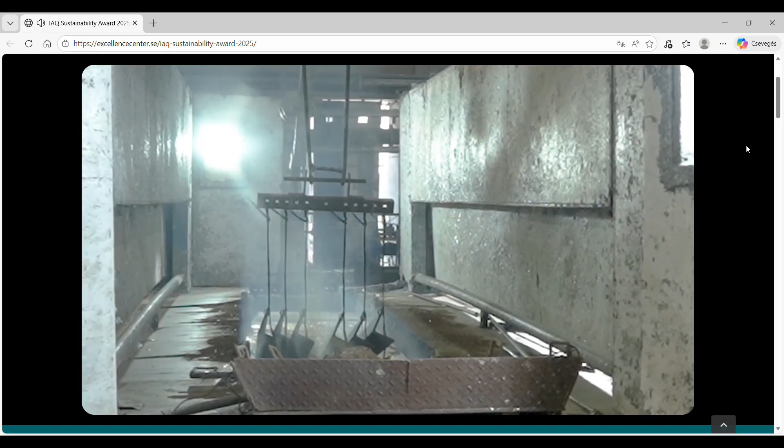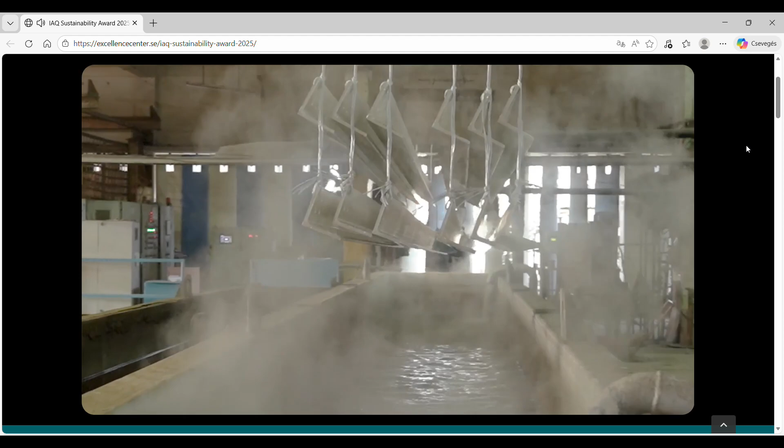In a world racing against climate change, L&T made a promise: water neutral by 2035, carbon neutral by 2040. A promise not written in reports, but etched into responsibility. But promises demand action, especially where the fire burns hottest. At TLT Works Pithampur, every transmission tower follows a precise manufacturing journey, from design to fabrication, to galvanizing and dispatch. But among all these stages, one process contributed the most to our carbon footprint.

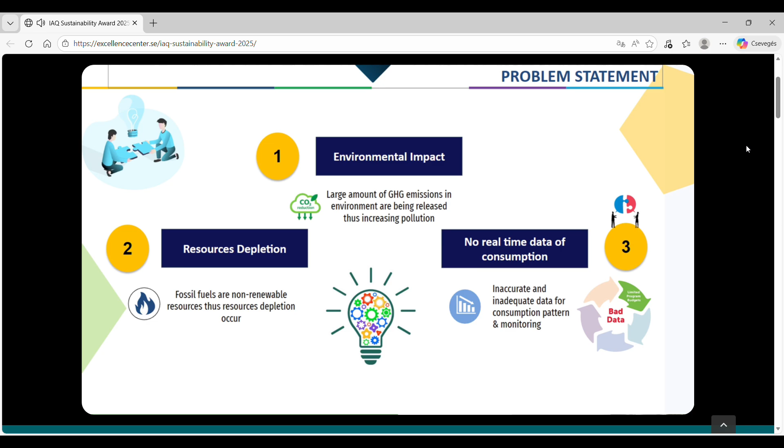Our galvanizing furnace consumed 836 tons of LPG every year, releasing 2,492 tons of CO2 into the atmosphere. This created 3 critical challenges: environmental impact, resource depletion, and the absence of real-time energy monitoring. To advance toward carbon neutrality, this had to change.

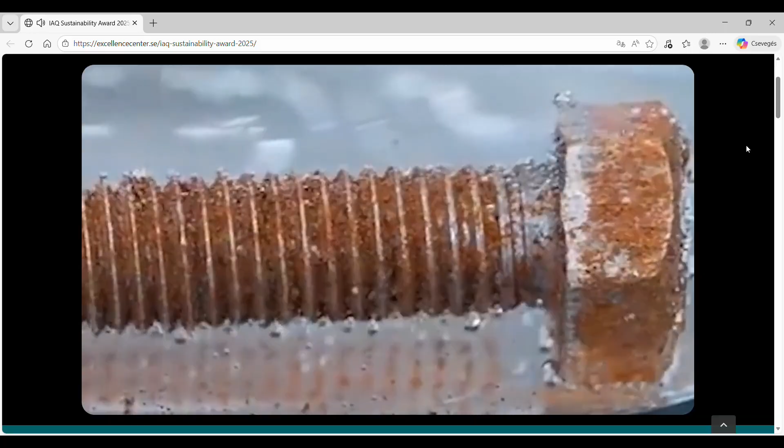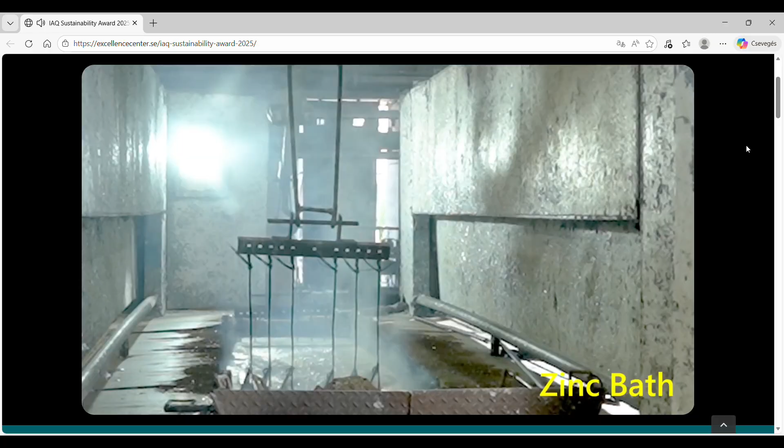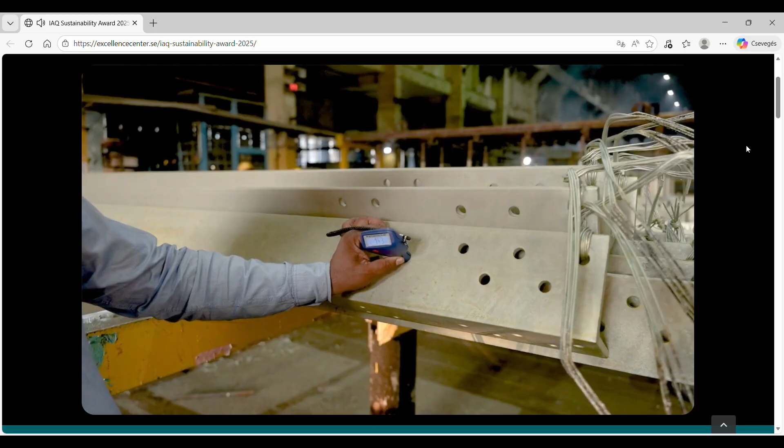The galvanizing process begins with surface preparation. Steel passes through degreasing, pickling, rinsing, and fluxing, removing oil, rust, and impurities to ensure strong adhesion. Next, the clean steel is immersed in molten zinc at 450 degrees Celsius. A metallurgical bond forms, creating a corrosion-resistant layer. Even if scratched, zinc protects steel through sacrificial corrosion, extending its service life for decades.

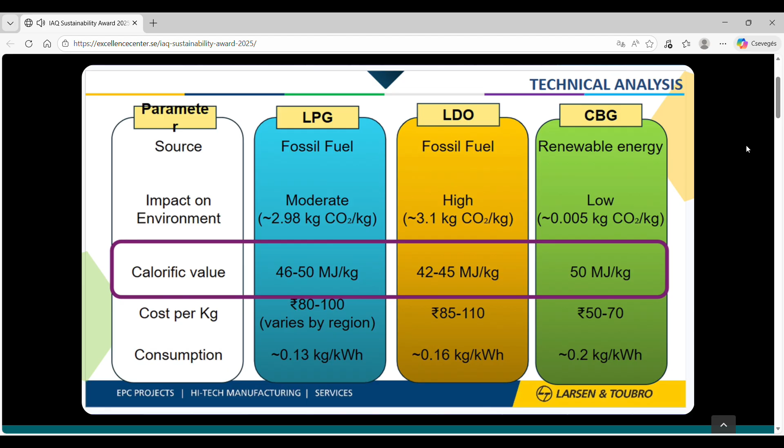We evaluated alternative fuels. LPG emits 2.98 kilograms of CO2 per kilogram of fuel. LDO emits 3.1 kilograms. But compressed biogas emits only 0.005 kilograms, making it almost carbon neutral. And with a calorific value equal to LPG, CBG became our preferred alternative. With detailed analysis and quality-driven brainstorming, we decided to transition our galvanizing furnace from LPG to CBG.

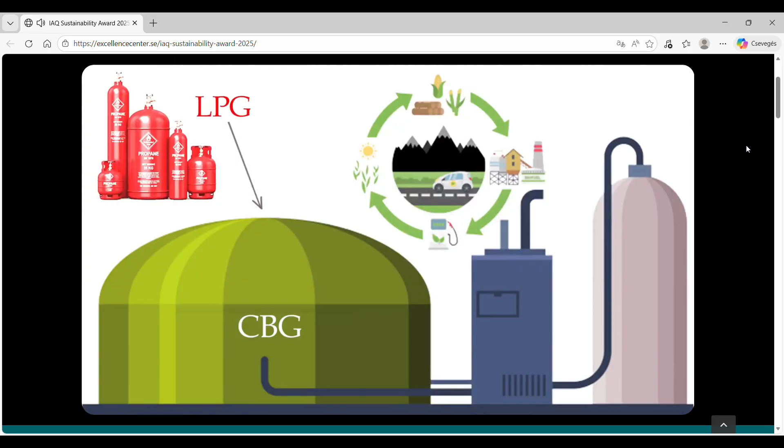We visited Indore's Gobardhan plant, Asia's largest biogas facility. We verified pressure, purity, and moisture content, and secured a reliable supply of compressed biogas for continuous furnace operations. Our first trial failed. The second failed. Moisture choked the burners. Pressure dropped. The flame collapsed. But through every setback, quality guided our next step.

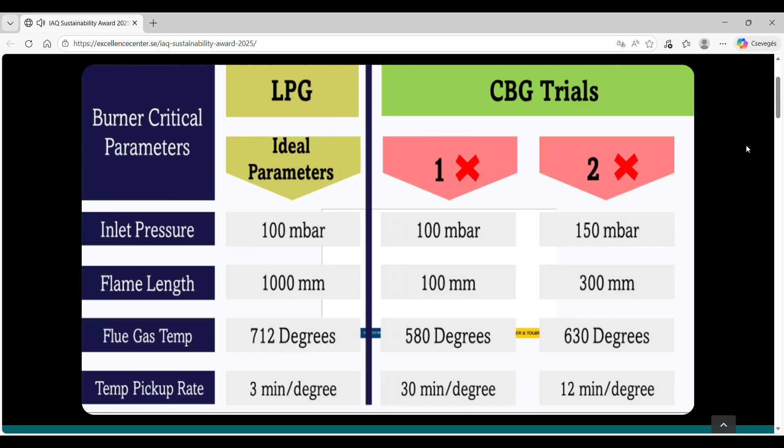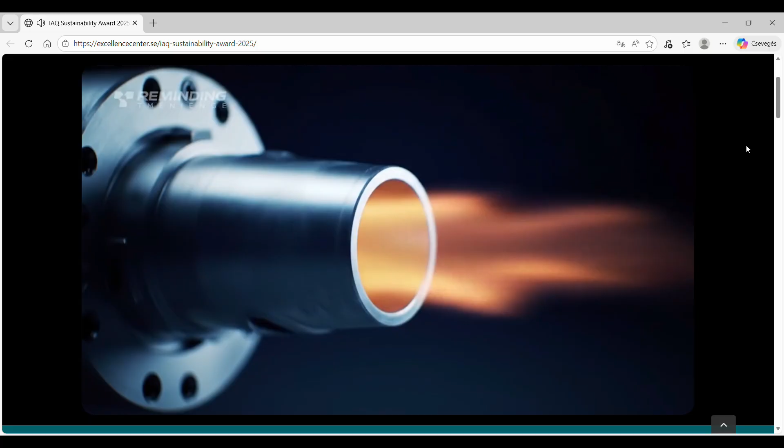To solve contradictions, we applied TRIZ, using Principle 35 to redesign a 12mm tapered nozzle, achieving 98% flame stability and a 10% increase in thermal efficiency. Using design of experiments, we optimized air-fuel ratios and pressure levels, reducing CO emissions to below 68 parts per million. Through Six Sigma, we controlled CO2 intensity to 0.005 kilograms per kilogram of fuel, within a tolerance of plus or minus 0.5%. And with 12 PDCA cycles, we achieved flame length consistency within plus or minus 2% at 150 millibar.

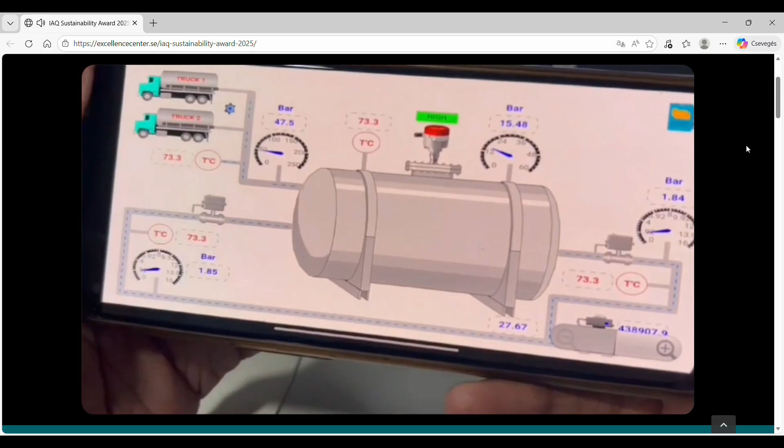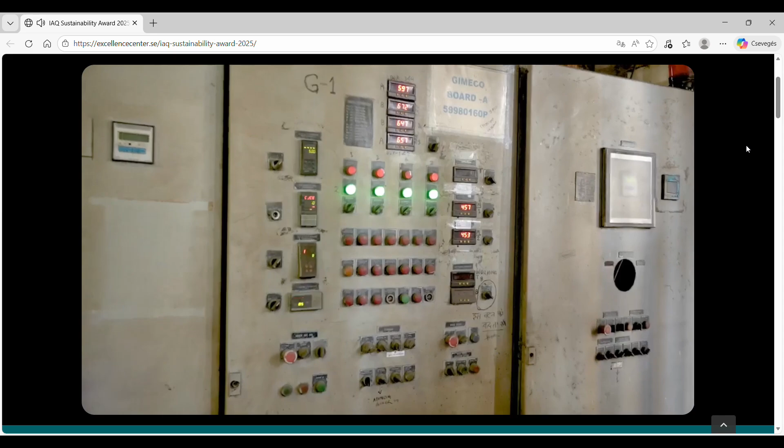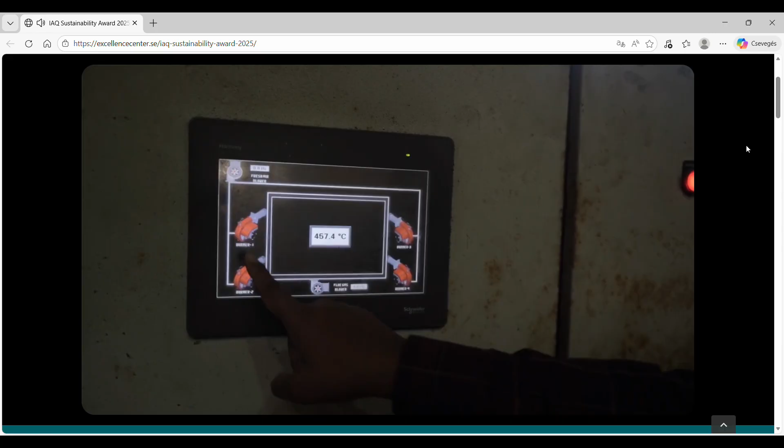A GSM Gateway enabled real-time mobile monitoring, bringing digital precision to our combustion system. We identified key risks: pressure surges, moisture carryover, and ignition failure, and mitigated them using safety interlocks, heated gas trains, pressure relief devices, and automated shutdown logic. Our solution was a multi-stage pressure regulation system with heating, moisture removal, dual ignition, and IoT-based control.

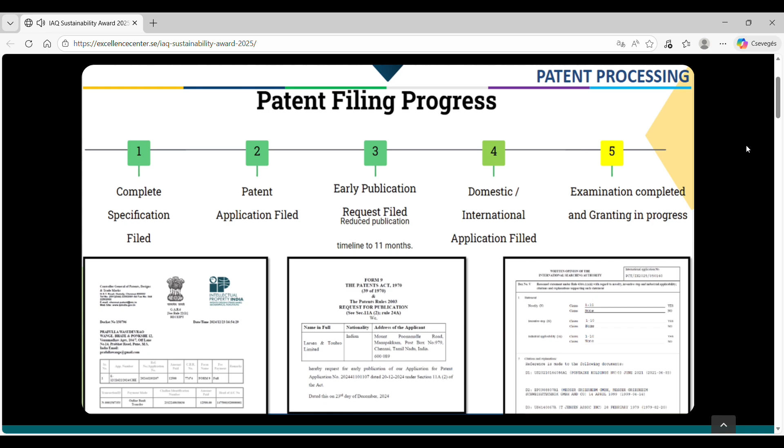This innovation is now protected under PCT/IN 2025/050160 and Indian Patent Application 2024-411-01107, recognized for novelty and inventive step. With this breakthrough, L&T Pithampur became India's first galvanizing facility to operate entirely on compressed biogas.

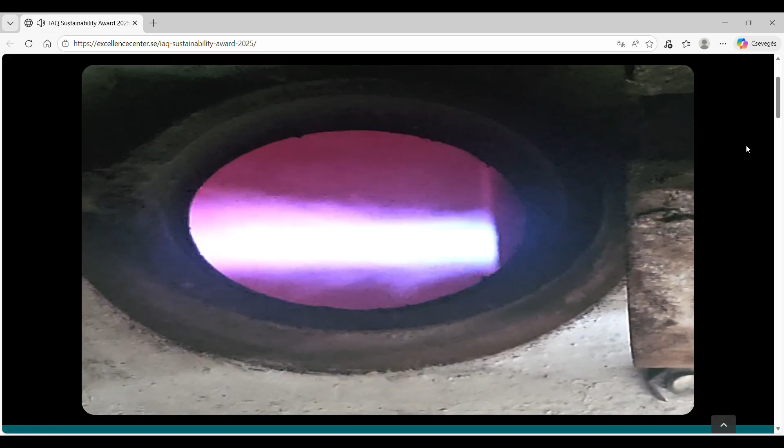One morning, the flames stood steady, quiet, clean, and perfect. A flame reborn for the planet.

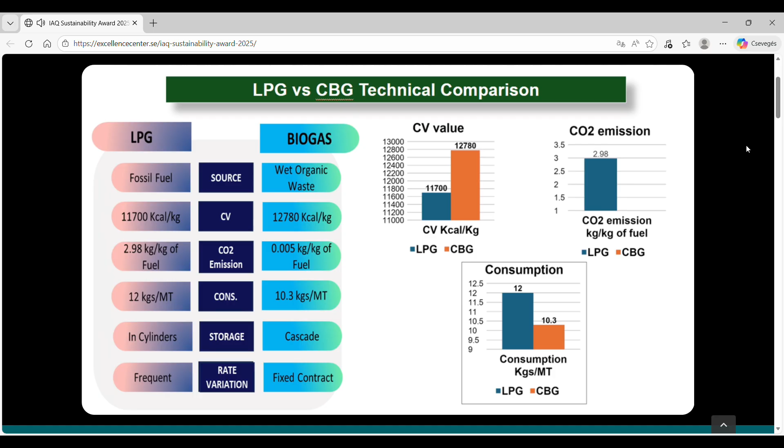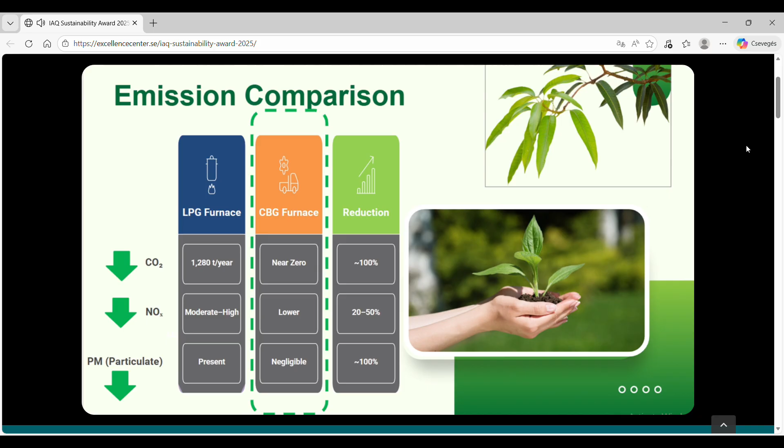Our results are measurable and impactful. CO2 emission intensity reduced from 3.01 to 2.75 kilograms per kilogram of fuel. Specific consumption reduced from 11.6 to 10.5 kilograms per metric ton. Combustion efficiency increased from 89.2% to 97.8%. And system uptime improved from 92% to 98%.

Our annual CO2 reduction now stands at 3,800 tons, equivalent to planting 171,818 trees every year. This initiative advances SDG 7, Affordable and Clean Energy, SDG 9, Industry, Innovation and Infrastructure, SDG 12, Responsible Consumption and Production, SDG 13, Climate Action.

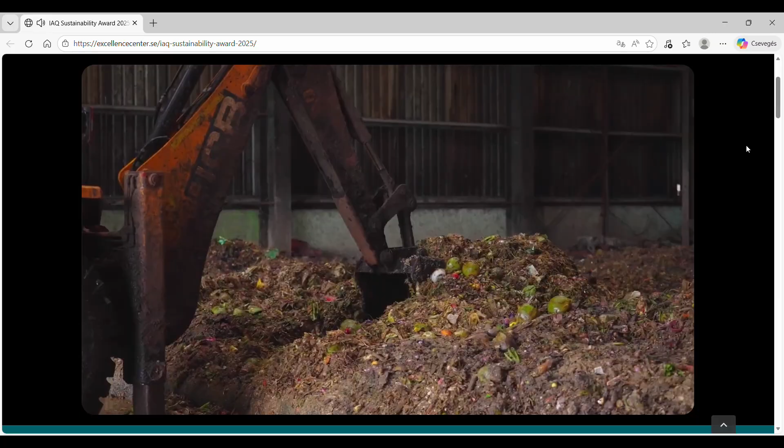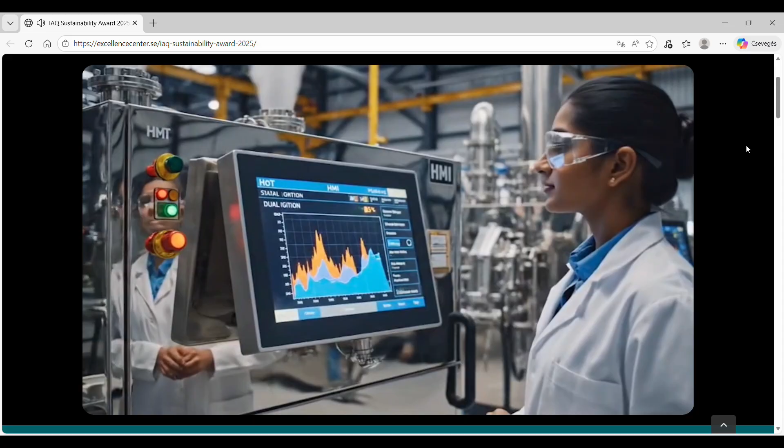Circular economy benefits include 550 tons of municipal waste converted into 17 tons of CBG and 100 tons of organic compost. Digital twin integration now tracks 470 data points per hour, enabling predictive decarbonization. And this model is being scaled across L&T facilities, achieving up to 42% OPEX reduction.

Neil Armstrong said, 'One small step for man, one giant leap for mankind.' This is our small flame, our giant leap toward a cleaner world.

Thank you very much for the presentation. For a change, I will start with a few questions. Two simple questions. The first one is about the leverage potential. In what way can this be expanded to other areas? And of course, this is dependent on availability of CBG gas.

Yes, sir. It can be implemented horizontally, can be deployed in other areas also. But as you said, the availability remains a constraint. If the gas is available, I think there should be more and more usage in such areas, like in our case for galvanization, like some more productions. Other factories in India, we are around setting up 30 plants with the help of our Prime Minister, Mr. Narendra Modi. So these type of plants will be located in various areas of the country. So I think the supply would not be a constraint in near future, sir.

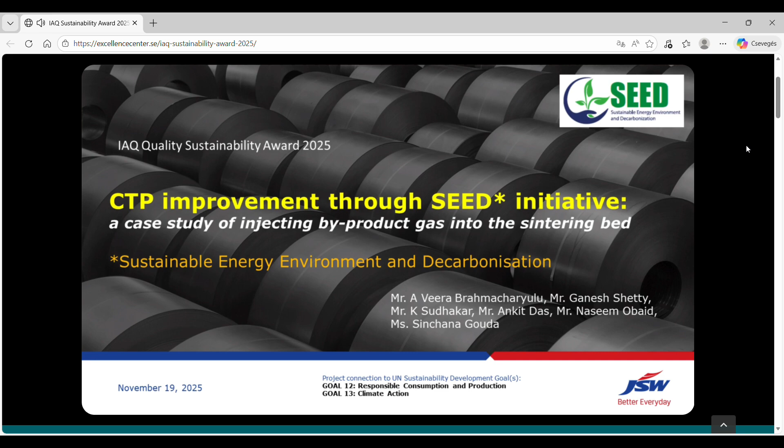Sinter, pellets, and coke are charged in blast furnace to produce hot metal, and pellets are charged in DRI shaft to produce DRI. The steel scrap and hot metal are charged in basic oxygen furnace to produce liquid steel. The steel scrap and DRI are charged in electric arc furnace to produce liquid steel.

The liquid steel is cast in continuous casting machines to produce slabs and billets. The slabs are rolled in hot strip mill and cold rolling mills to produce flat products. The billets are rolled in wire rod mill and bar rod mills to produce long products.

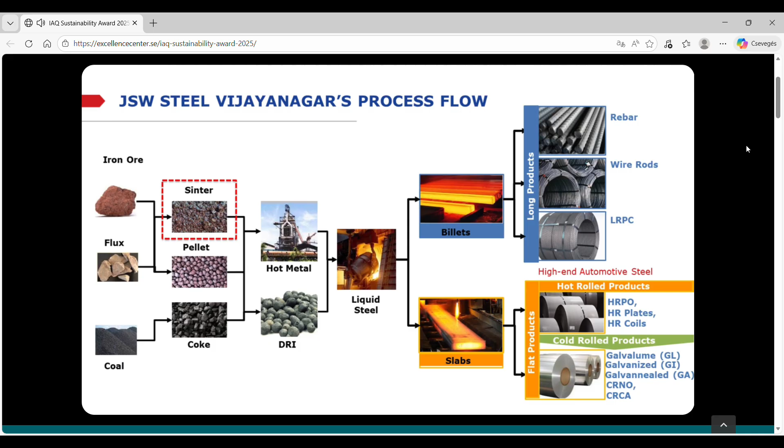The byproduct gas generated from coke oven, corex, blast furnace, LD, and DRI are mixed and called mixed gas. The mixed gas is used for various heating applications in the entire integrated steel plant.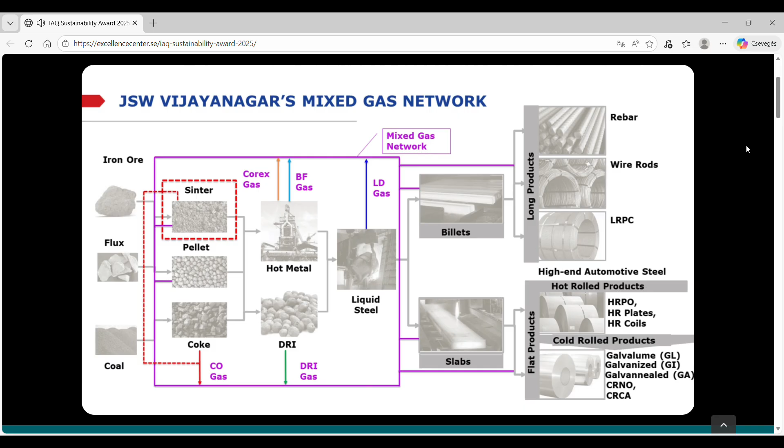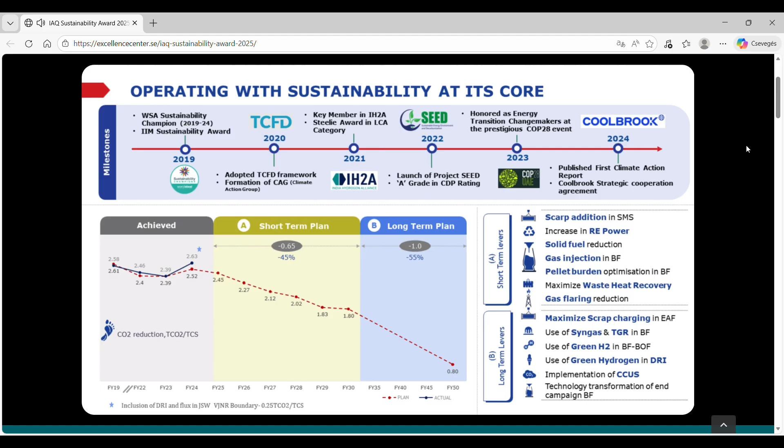This is the roadmap for decarbonization consisting of renewable energy, green hydrogen-based steel making, carbon capture, utilization, and storage. Here is the strategic plan to reduce the current CO2 footprint from 2.5 tons to 0.8 ton per ton of crude steel. Our incremental decarbonization initiative, SEED, stands for Sustainable Energy, Environment and Decarbonization.

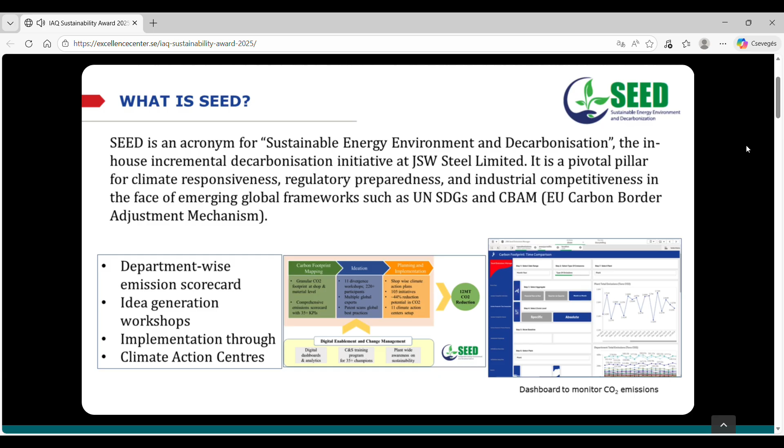This is a dashboard to monitor CO2 footprint. There have been several quality improvement programs through SEED. Our case study, injecting coke oven gas into the sinter bed, showcases improvement in CTP, critical to process. We also improved the production and CTQ, critical to quality.

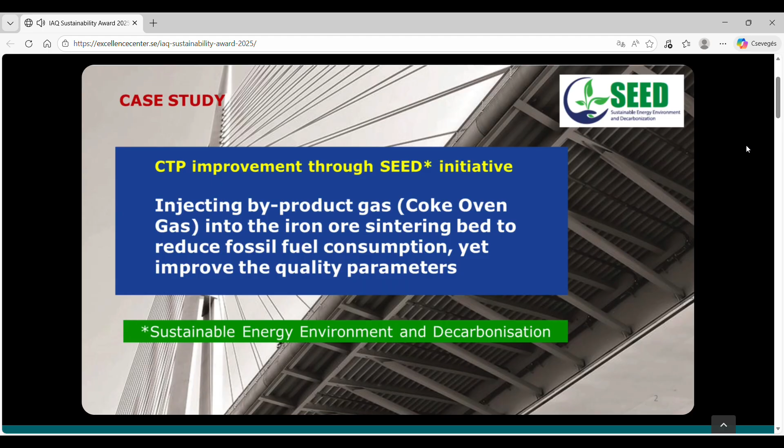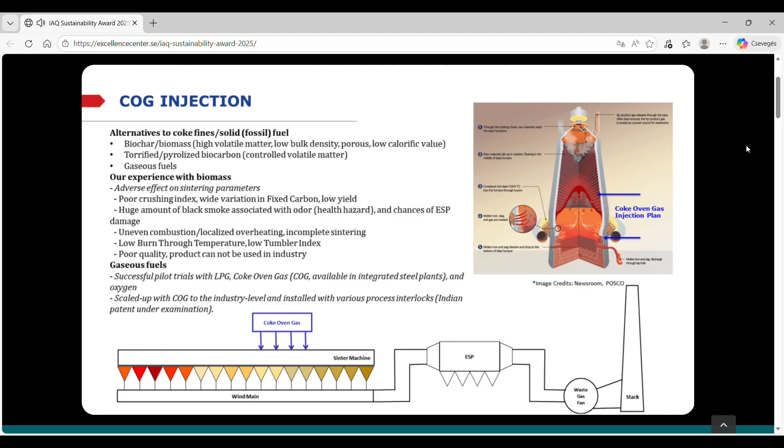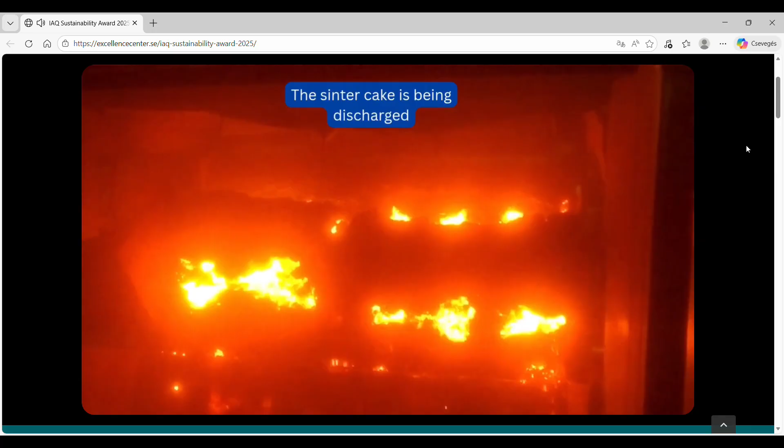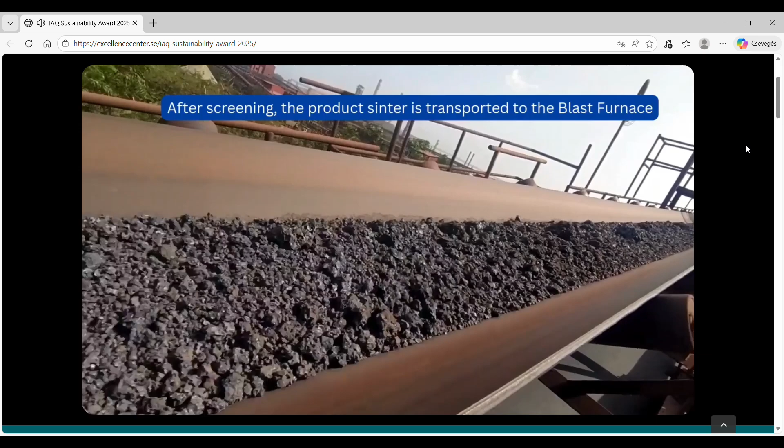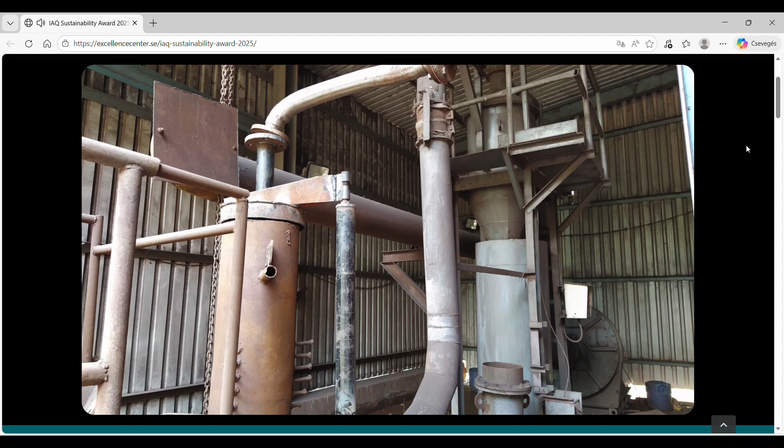The pilot trials began in 2019 using sinter pot facility. It did not have arrangements to inject gases, so we introduced a gas injection system and conducted trials. The product sinter was dense, had higher strength, and better elevated temperature properties. Due to parametric interplay which is inherent to sintering process, the alpha in the design of experiment showed 1.4.

Oxygen, which can improve the combustion efficiency of coke, and liquefied petroleum gas LPG as an alternate gaseous fuel were injected to see their effects. The coke oven gas has about 57% hydrogen, a carbon neutral source of heat and reductant of the iron ore.

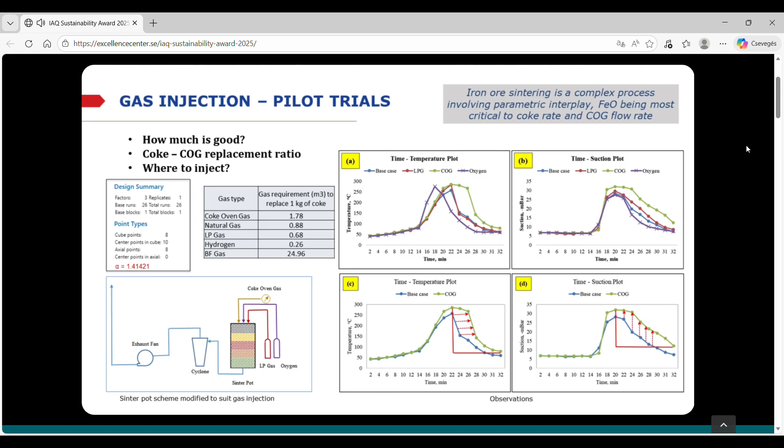When injected, COG outperformed LPG. Hydrogen in the COG enhanced FeO formation. Superior mineralogical phase assemblages were noticed, which resulted in enhanced properties of the sinter. The voice of the process indicated improved thermal regime and mineralogy.

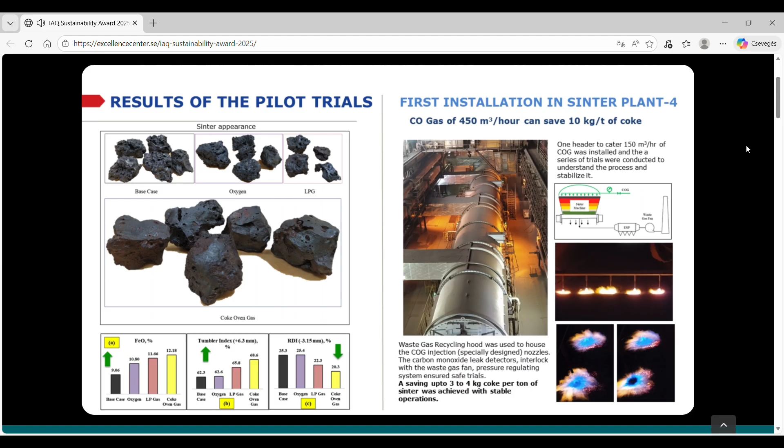After proving the concept, we scaled up by designing COG header, nozzles, and installed the system in Sinter Plant 4 in 2020 during COVID times.

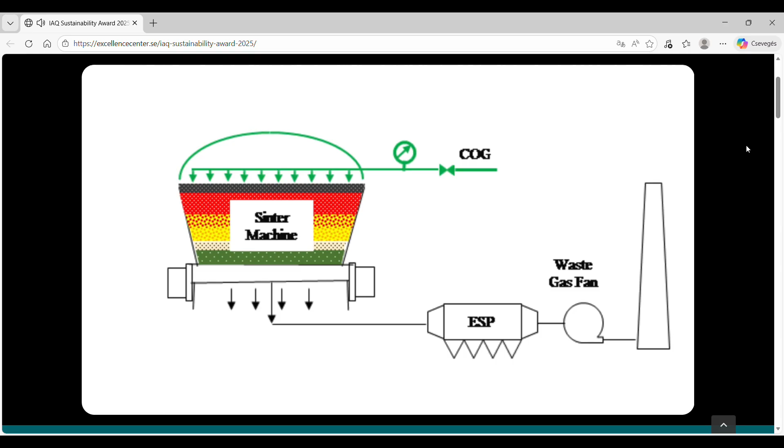This is the scheme of the injection system. The design involved 3 headers of 150 cubic meter per hour capacity each, and nozzles to inject COG close to the sinter bed.

Multiple trials were conducted to fine-tune the process, and we continued injecting for more than 1.5 years. Sinter plant 2 and 4 consume the base mix from a single source.

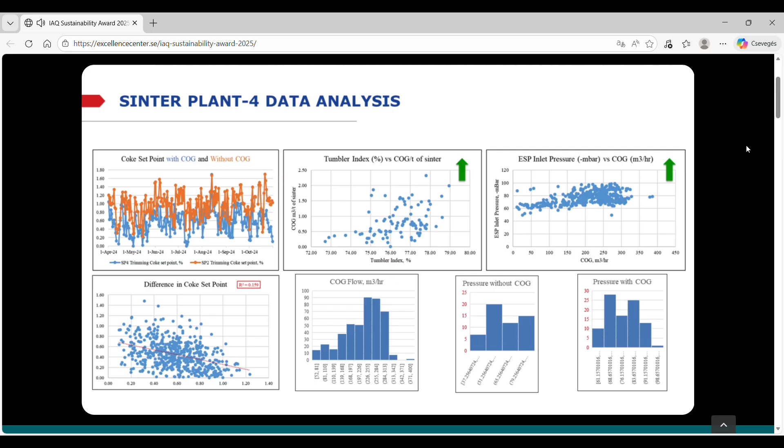With COG being injected, sinter plant 4 consumed less coke, as seen by the coke run chart. The tumbler index and suction increased due to COG. Analysis of variance shows the process capability of FeO increased from 0.27 to 0.35.

After successfully proving the industrial scale concept, the COG injection system was installed in sinter plant 3, which is double the capacity of sinter plant 4.

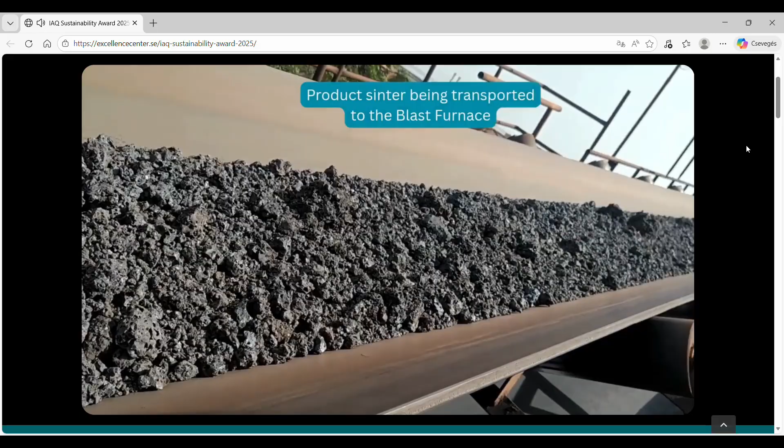Data analysis of sinter plant 3 indicated higher tumbler index and process capability. In both sinter plant 3 and 4, the elevated temperature property RDI remained unchanged. Hypothesis testing confirmed that the sintering process is not delayed due to prolonged thermal regime.

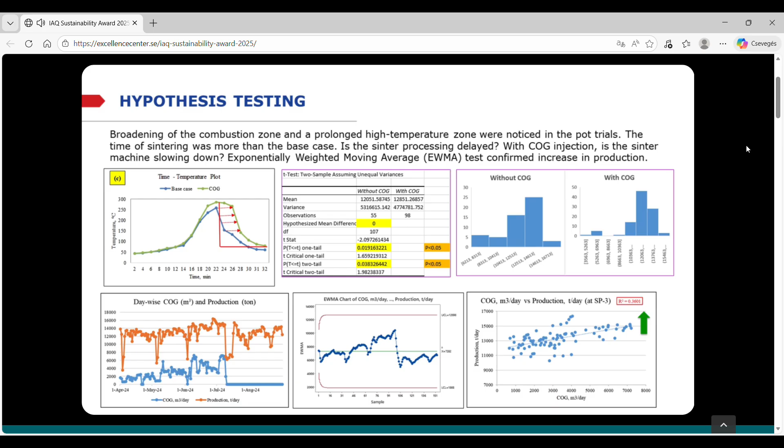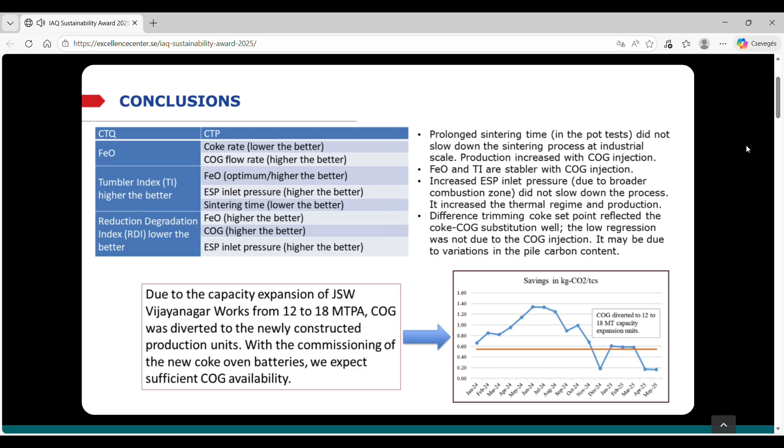Exponentially weighted moving average confirmed an increase in production of 800 tons per day, that is about 6%. With this improvement, it is possible to save about 30 Indian rupees per ton of sinter, or 2.3 million Indian rupees per annum directly. Thank you.

Yes, thank you very much for the presentation and the project. Any questions from the team?

One of the elements of the award talks about leverage potential, and this is a very good and interesting project. But it's obviously very much focused on, in this case, sintering and within the steel plant. Do you see any other areas where there could be an application for this technology, this idea of injecting gas into a stream of material?

Beyond integrated steel plant, sir? Yes. I know all about steel plants and sintering in steel plants, but I was wondering if the concept as such, if you see any other application areas.

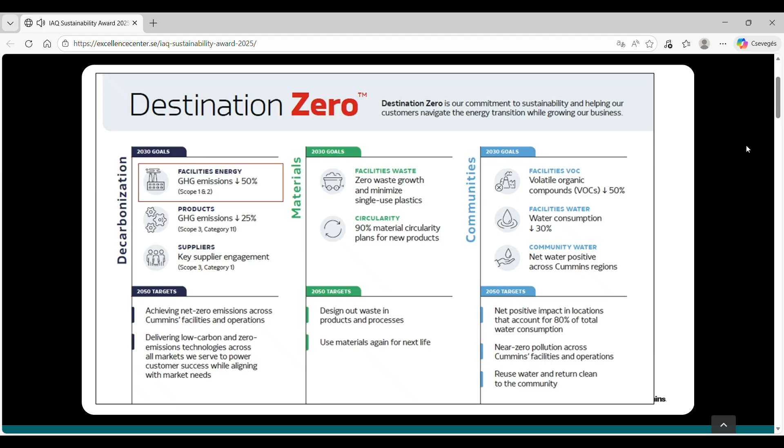With that in mind, I'll give you an overview of the Destination Zero goals. The first goal talks about facilities energy: greenhouse gas emissions reduction by 50% from the base level of 2018 by the year 2030. With that in mind, the team started looking at opportunities for how the quality function can contribute towards these Destination Zero goals.

One of the areas that the team identified is where we test our engines post-production in our test cells. This consumes a lot of diesel because of the test cycles used to check the product's performance for customers and customer-specific requirements. The team thought through how we can bring down the overall GHG emissions by optimizing the test cycles, and whether we can improve quality while achieving GHG emissions reductions.

So a Six Sigma team was formed. Cummins has a very good culture of Six Sigma, and it is embedded in the culture of the organization. We have dedicated roles of master black belts, and there are people who also do projects as green belts. So a Six Sigma team was formed with the black belt taking the lead on test cycle optimization, because that was the major opportunity for GHG emissions reduction.

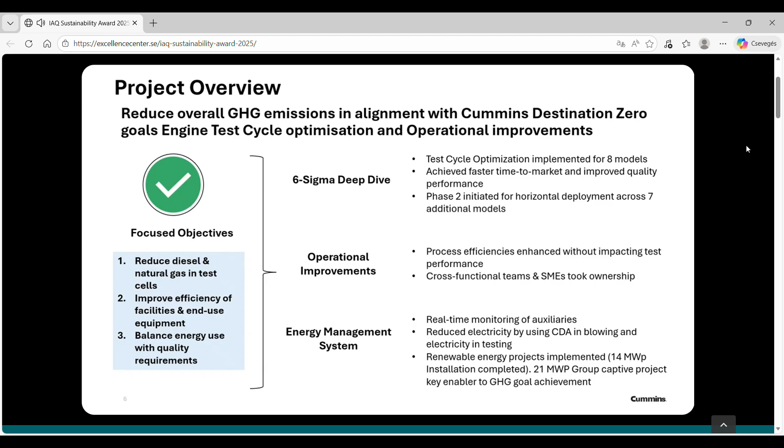So base work was done checking the level of test cycles being used for the current products and platforms, and the opportunities in the operations of the auxiliary units that support the entire test cell system. All put together, can we bring down the scope 1 and scope 2 GHG emissions without impacting quality? And the energy management system was one of the key enablers that helped us in measuring, monitoring and identifying the gaps in what can be done differently in scope 2 generation and consumption of electricity as well.

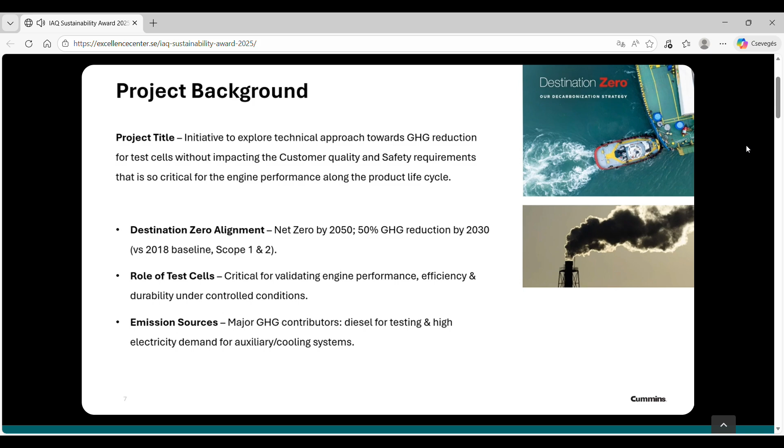So with that project background, the team started really collecting data in terms of each of the platforms, what was the original test cycles and what can be the next level through the CAE analysis to check whether the revised test cycles that the team was trying to contemplate through the simulation tests, when actually applied in the test cells during the testing cycles, would yield the same result or not, and would have no long-term impact when the engine is already in the field.

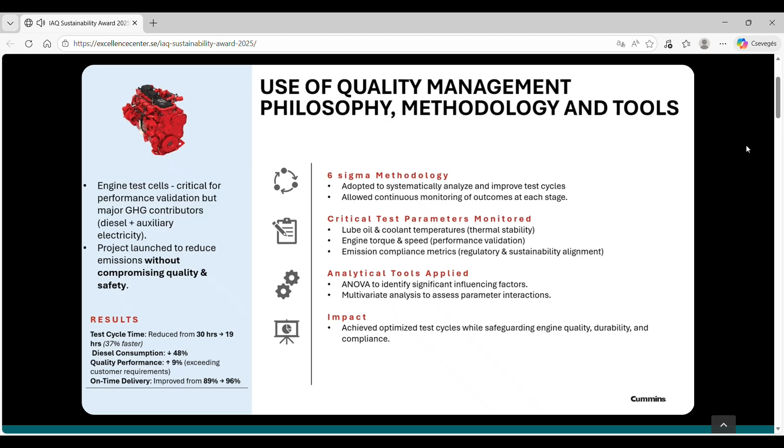With that premise in mind, the team started doing a lot of data mining in terms of collecting the data on the test cycle parameters, and trying to really project through the simulation analysis. A lot of tools were used like ANOVA and multivariate analysis. I'll come to it in the last slide, but overall results showed that for all the 8 platforms the team chose, the average time of testing came from 30 hours to 19 hours, which was a substantial reduction.

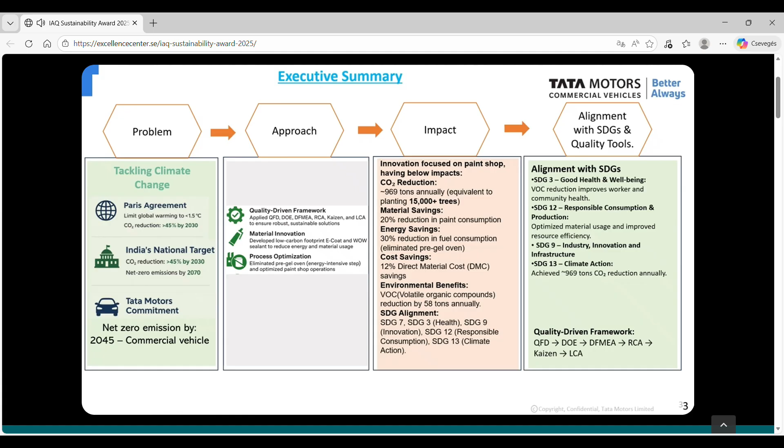Our efforts directly contributed to 4 key sustainable development goals, including climate action and good health. This alignment ensures our innovations are not only impactful but also globally relevant. Through innovation, quality and commitment, Tata Motors is driving meaningful change towards a sustainable future for commercial vehicles.

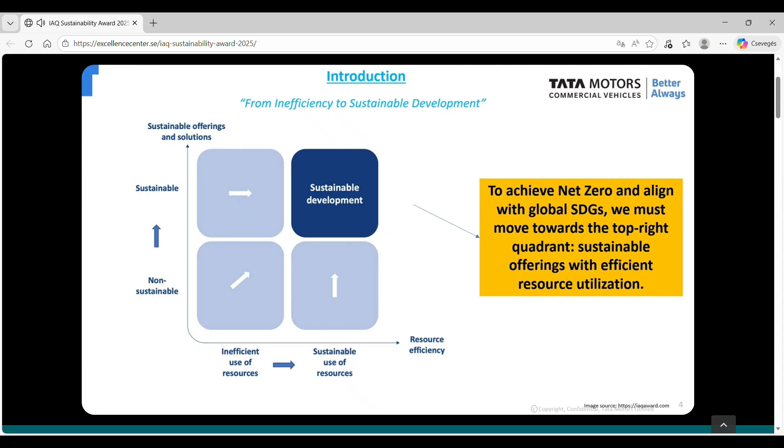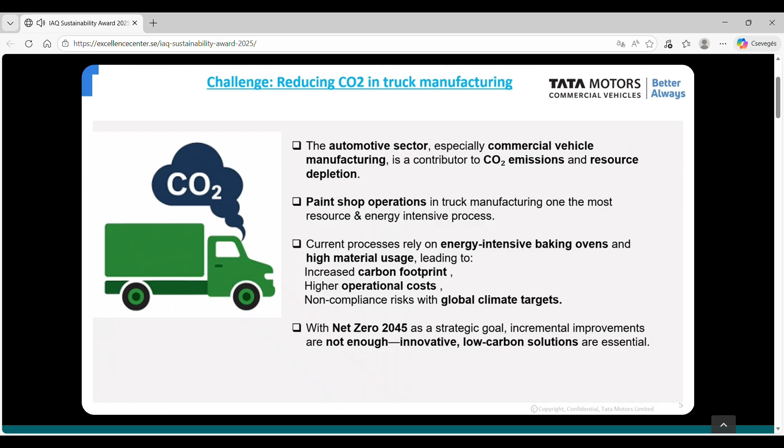With Tata Motors Commercial Vehicle aiming for net zero by 2045, we recognize that incremental change won't be enough. What's needed is a transformational shift. That's where innovative low carbon solutions reimagine how we operate. This challenge sets the stage for the approach and innovations we will discuss next.

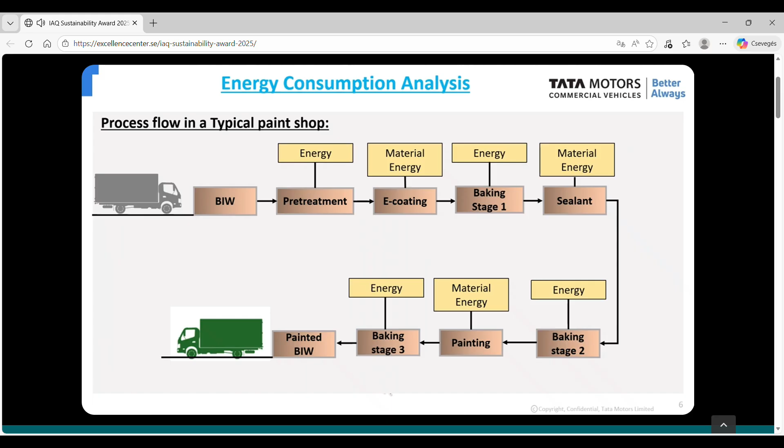Reducing energy consumption in these stages is not just about cost saving, it's about aligning with our net zero goals and driving sustainable manufacturing practices.

To further understand the challenge, let's look at the energy consumption across different stages of vehicle manufacturing. This analysis, based on industry data and internal assessment, breaks down energy use into key areas: body shop, paint shop, line, motor pool, and shipments. But the most striking insight comes from the paint shop. The paint system alone consumes between 30% to 50% of the total energy and material used in the entire manufacturing process.

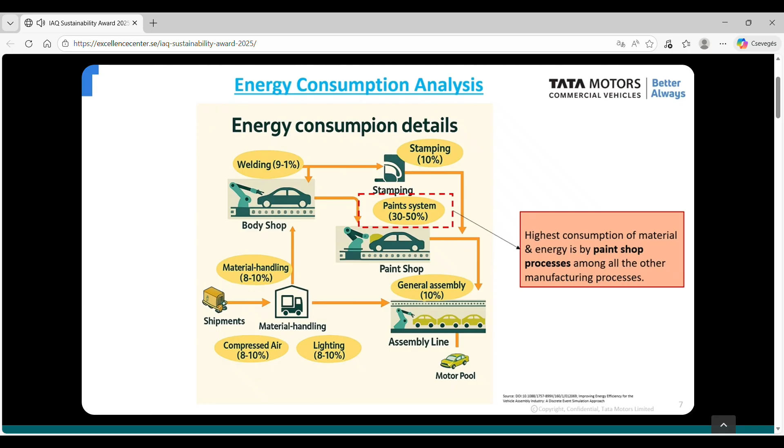This makes it the single largest contributor to energy consumption and carbon footprint in our operation. Given this, it's clear that any meaningful reduction in CO2 emission must begin with rethinking how we operate our paint shops. And this insight has guided our innovative efforts and our focus on the paint shop energy consumption and material consumption reduction, which we will explore in the next section.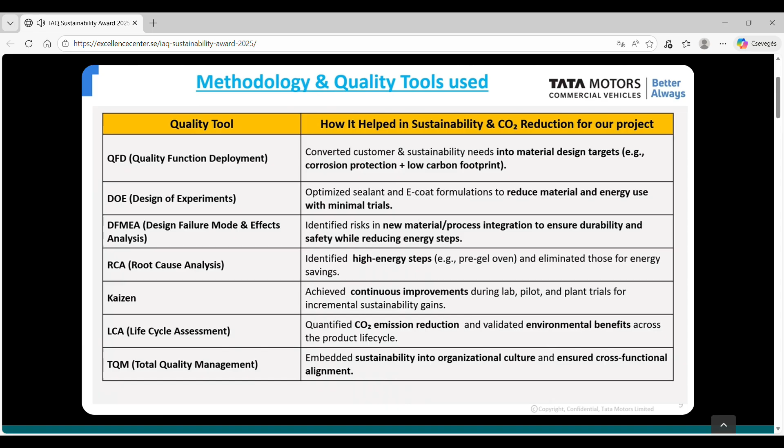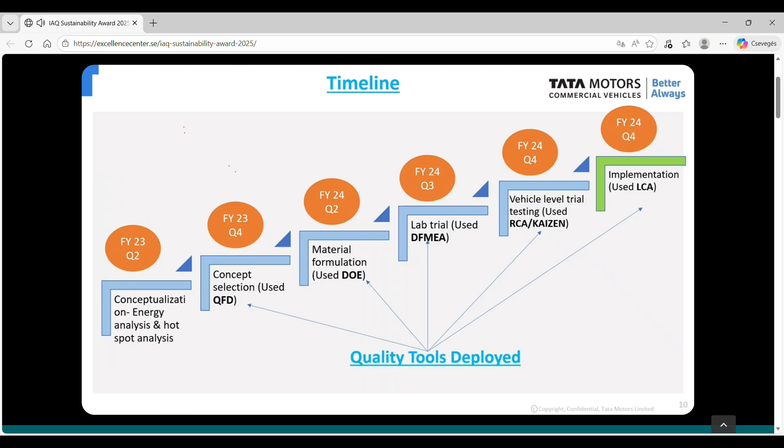Our life cycle assessment, LCA, quantified CO2 emission reduction and validated environmental benefits across the product life cycle. Finally, total quality management embedded sustainability into our organizational culture and ensured strong cross-functional alignment. Together, these tools formed a robust framework that enabled us to deliver impactful sustainable innovation. This slide shows the timeline, from the start till the end, and where at each milestone which quality tools have been used and how they have helped achieve this final goal.

This slide showcases the key innovations that help us significantly reduce energy and material consumption in our paint shop operations. Let's start with the process flow. Traditionally, the paint shop involves multiple stages starting from BIW, moving through pre-treatment, e-coating and several baking steps before reaching the final painted BIW. Now, two major innovations were introduced in this flow. First is the E-coat stage. We developed advanced high-throw power E-coat. This was achieved by incorporating a branched epoxy resin structure with flexible hydrophobic segments, and this reduced both material consumption and baking temperature, leading to lower energy use.

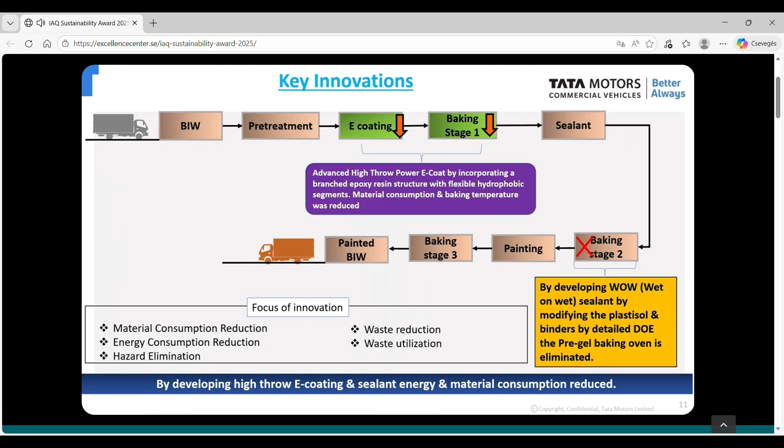Second, we introduced a WOW sealant, which is wet-on-wet sealant. This breakthrough allows us to eliminate baking stage 2 entirely, which was previously a major energy consumer. By eliminating this oven, we achieved a substantial energy saving and reduced operational complexity. These innovations were not just about efficiency, they were designed with a broader sustainability focus. As highlighted below the diagram, our goals included reducing material consumption, reducing energy consumption, eliminating hazardous steps, minimizing waste and utilizing waste effectively. In summary, by developing a high-throw E-coat and WOW sealant, we have made significant strides in reducing both energy and material consumption, aligning our operation with our net zero goals and global sustainability standards.

This slide summarizes the tangible outcome of our sustainability initiatives and how they align with the United Nations Sustainable Development Goals. The 4 United Nations Sustainable Development Goals, SDG 3, which is good health and well-being, SDG 9, which is industry, innovation and infrastructure, SDG 12, which is responsible consumption and production, and SDG 13, climate action, are directly impacted as described in the table above.

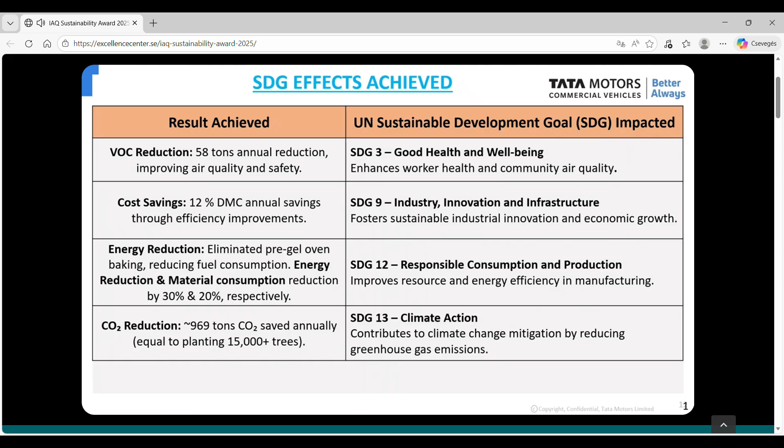These slides highlight the unique breakthroughs that set our innovation apart, not just in terms of performance, but also in sustainability and process efficiency. Let's begin with how we have revolutionized process efficiency. We successfully eliminated the pre-gel oven baking step, which was one of the most energy-intensive stages in the paint shop. This not only reduces energy consumption, but also simplifies the overall painting process. Importantly, we achieved this without compromising corrosion protection. The integrity and durability of the vehicle remain intact even with the streamlined process. This marks a significant step towards sustainable manufacturing, enabling a more agile and energy-efficient production environment.

Now let's look at the material innovation that made this possible. We developed a wet-on-wet sealant formulation featuring a novel polymer backbone and adhesion promoter. This allows paint to be applied directly over wet sealant, eliminating the drying and reducing cycle time. We also introduced a high-throw E-coat using a branched epoxy structure. This enhances internal surface coverage and corrosion resistance, especially in complex vehicle geometries.

Together, these innovations not only improve performance and durability, but also significantly reduced energy usage and operational cost, making our manufacturing process more sustainable, efficient, and truly future ready.

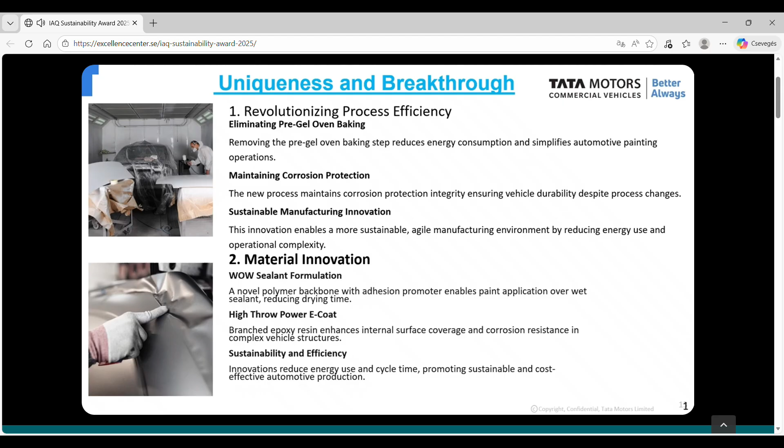Now, this slide highlights the dual impact of our innovation. That is, on one hand, it has environmental sustainability impact. On another hand, it has financial efficiency. Let's start with the environment benefit. By implementing sustainable material and optimizing our paint shop process, we have successfully reduced 969 tons of CO2 emissions annually. To put that into perspective, it is equivalent to planting over 15,000 trees every year.

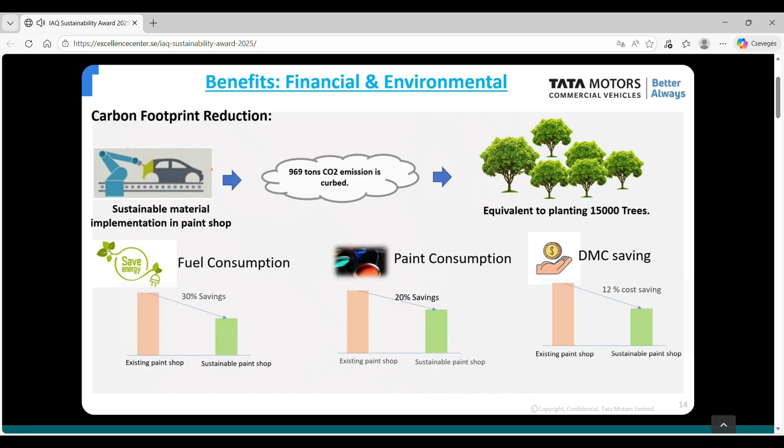These results clearly demonstrate that sustainability is not just good for the planet, it's also good for business. By reducing waste, utilizing energy efficiently, and reducing emission, we are creating a more responsible and resilient manufacturing ecosystem. With these benefits, Tata Motors commercial vehicle is setting a benchmark for sustainable industrial innovation.